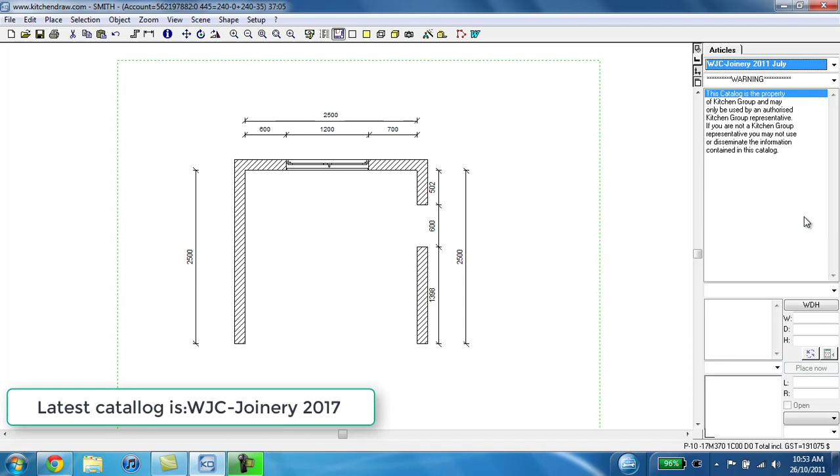It's always a good idea to start in the corner of a room and work outwards. So I'm going to start with a corner bifold cabinet. Being that that's a floor cabinet, I find it under this section and click. Here are the various types of corner bifolds. I'm just going to go with the stock standard 880. Remember, you can check here for your left and right options. I'm going to go with the left.

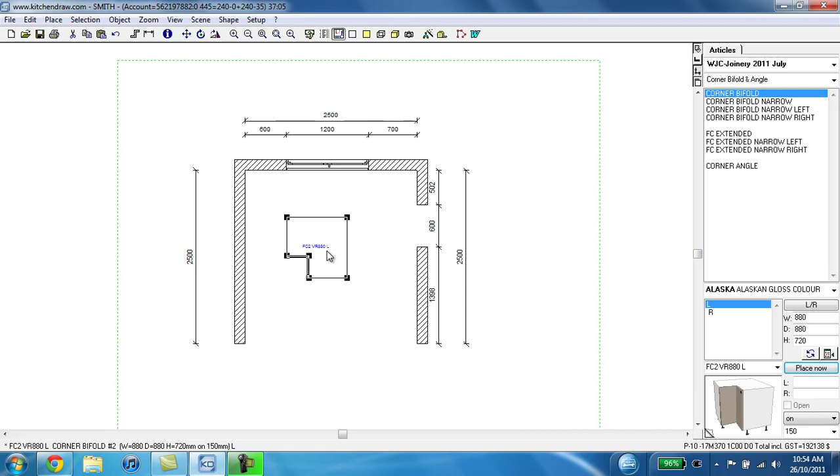Now, to put it onto my drawing, I click on the little 3D view. Keep in mind, if you can't see the 3D view, you just want to turn the page once or twice. Click and drag over into position. Before letting go, if you drop it on the middle of your screen, it'll plant itself right there. I'm just going to delete that for the next demonstration.

But if I want to snap it exactly into the corner, I click and drag. What I want to make sure is, because I want it in this corner, I can twist it into place or spin it. While I've got my left click held down, you can click the right button on the mouse and it's going to spin.

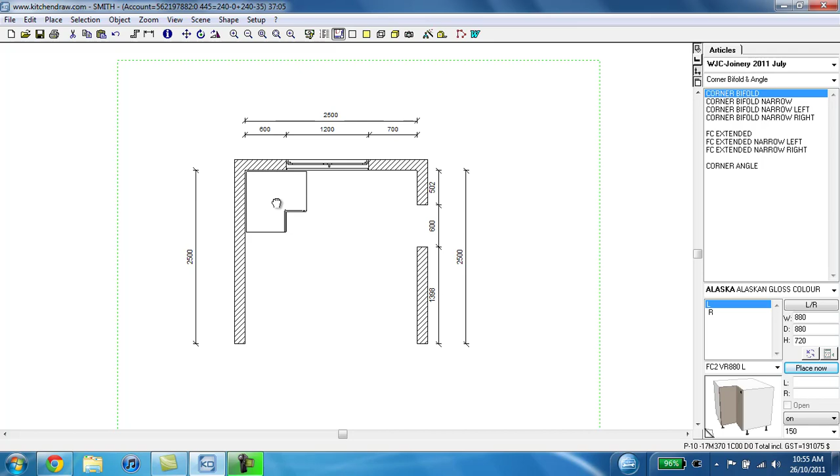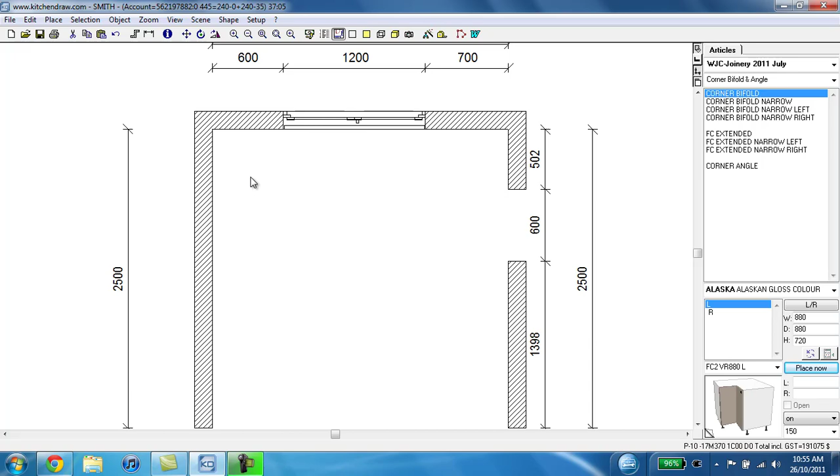Now, I could get it roughly into place here and plant it, but on zooming in, it's not quite on the wall, as you'll see. The best trick for that - I'm just going to delete it again. Click and drag. I'm going to deliberately overlap the cabinet with the two walls that I'm interested in it sitting right up against. It doesn't even matter that I haven't spun it into the right direction. If I just let go of the mouse, it automatically places it exactly into the corner. Perfect.

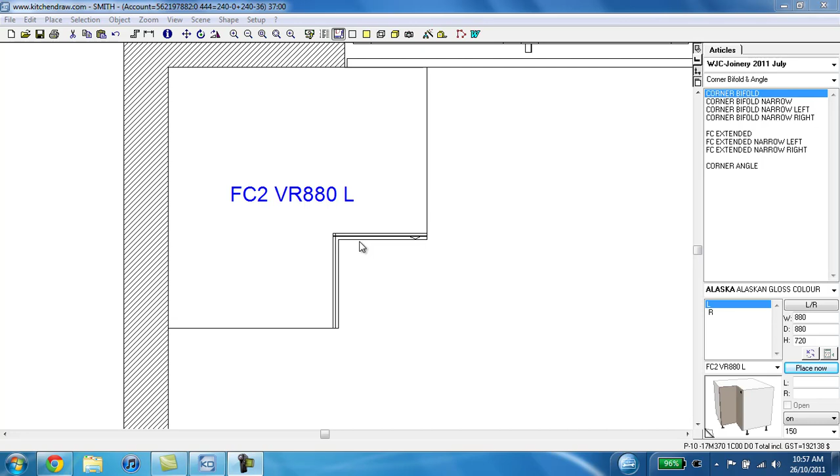So before, when I was dropping this cabinet into place and it wasn't exactly where I wanted it to be, I just kept highlighting it and pressing delete to start again. But let's say you don't want to delete the cabinet - you can click on it to highlight it, click and drag and move it around. So you don't have to go back to the catalogue each time. You can move your cabinets around once they're on the screen. But to get it smack bang in place, put it in the corner, overlap the walls, and there it goes. Once you've got that starting point, it becomes a lot easier to enter in the rest of the cabinets.

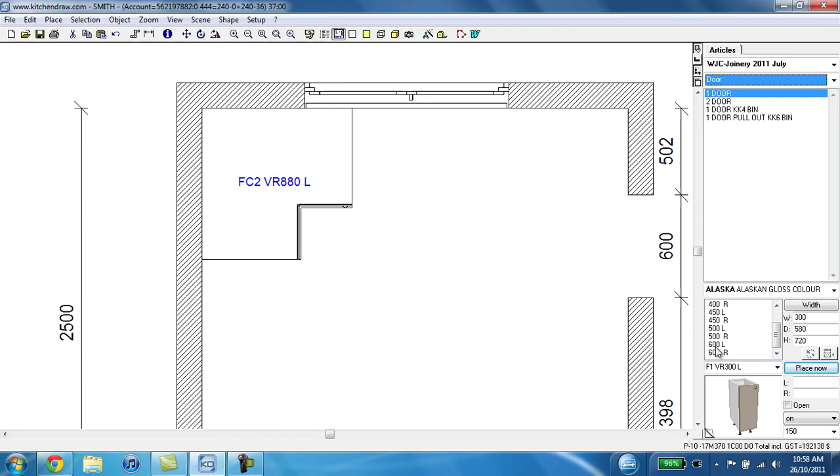So let's say now I want to enter a floor cabinet with one door that's 600 wide. I go back to my subcategory because I'm already in the joinery catalogue. Here are my floor cabinets with one door, and I want a 600 wide door with the hinge on the left hand side. I click, and all I have to do is make sure that it's overlapping the cabinet that I want to sit it exactly next to. So I can plonk it there and let go, and it snaps into place.

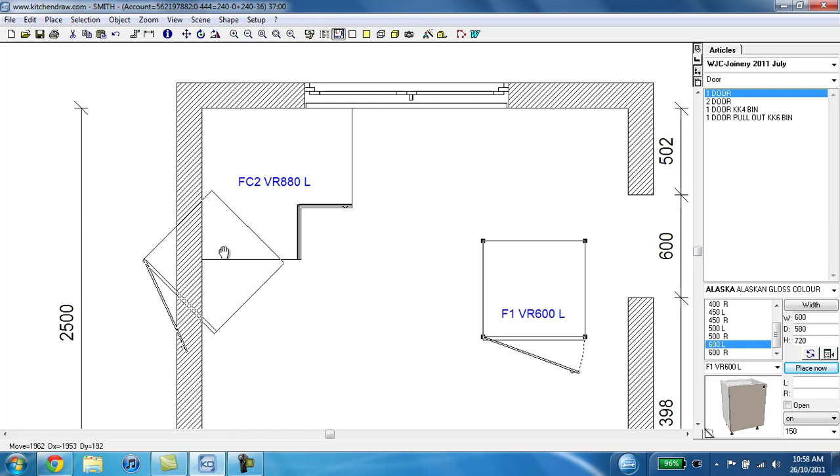Alternatively, I can just hover it over the wall and the cabinet puts it in place. Again, even if I've got it in the wrong direction, if I put it like that, it'll snap into place again. Same works for if I want it over on this side - I let go and it puts it into place for me.

So just to show you that spin and rotate once again, in case you've missed it: click on any object to highlight it, left click again to click and drag to move it about. While you're holding your finger down on the left button, use another finger to click the right button to get it to spin, 45 degrees at a time. Plonk it into place there if you like, or plonk it back into place.

Always remember, it's a very good idea to start in the corner and have all your cabinets snap up to that. It means you don't lose any space - even a few millimeters here or there can make a difference. So theoretically, you can now build the majority of your kitchen with the cabinets. Keep going back to the subcategories here.

Plonk things into place. You'll get a lot of practice at this in your training exercises. Actually, that one's a wee bit too big - just press delete then, and put that into place.

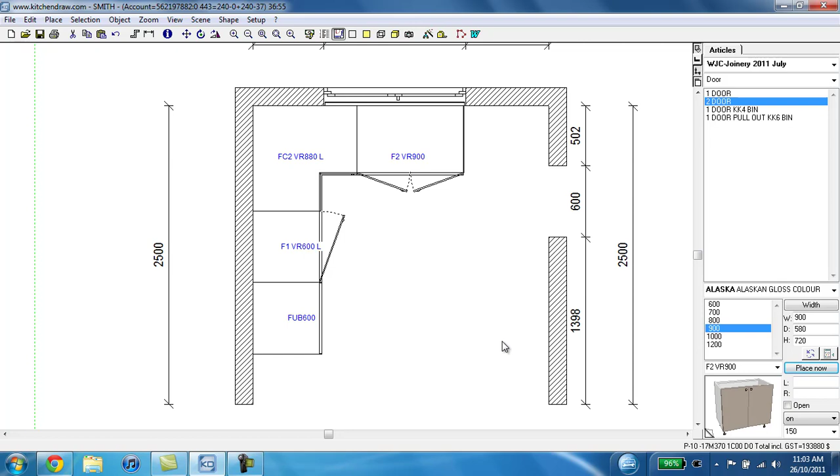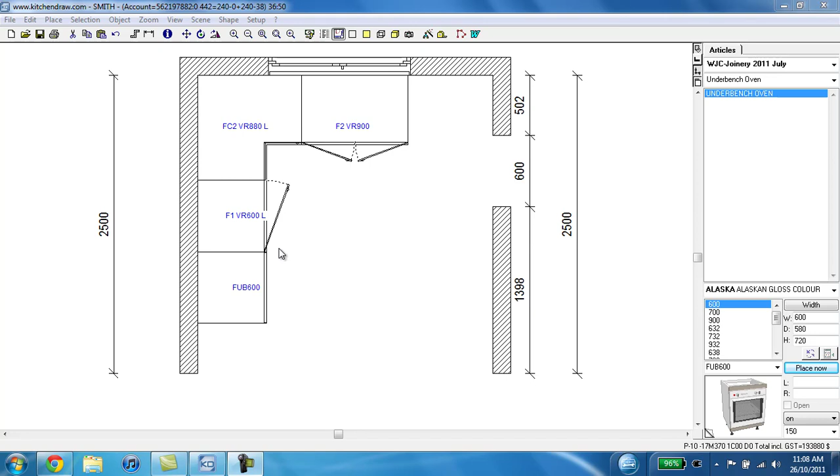Alright, moving on to fillers. As you should know, fillers are required between walls and the start of any cabinet run. So in some cases, fillers may be the first thing you place into your drawing rather than corner cabinets. I'm just going to delete what I've done here, just to demonstrate how to place some floor fillers.

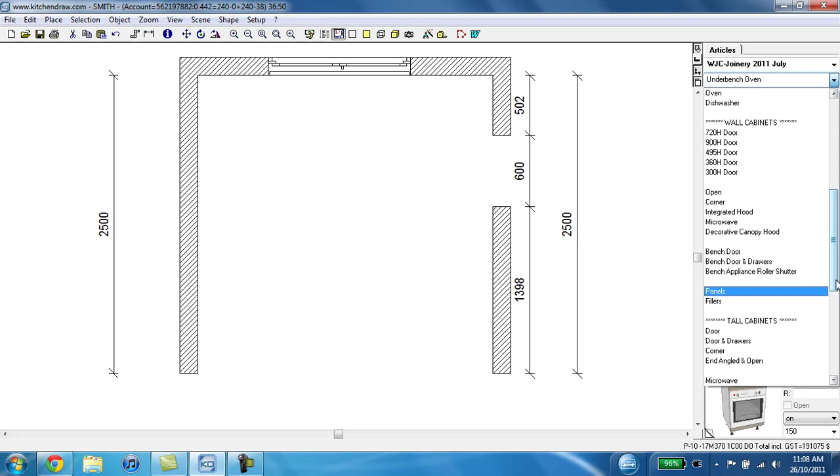There are several types of fillers, so we've categorized them with the cabinets that they go with. For example, there are floor fillers, wall fillers, tall fillers, and so on. But for purposes of this demonstration, let's go with a floor filler.

Now there's two types. It's going to ask you either a filler that stays on the kickboard like the cabinets, or a filler that goes to the floor. In this case, I'm looking at a kickboard filler.

In this option here, it gives you the various sizes. If it's just going next to a normal cabinet, the height is 720, like a standard cabinet. So that's what these numbers are here. But the first lot of numbers are to do with the width of the filler, so I'm going to start off with a 30mm wide filler.

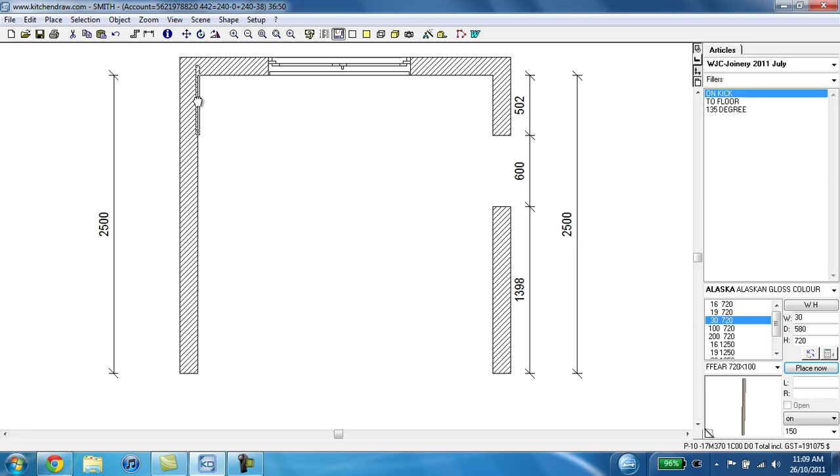And click and drag it into place. Now, like the cabinet, I just overlap it with the two walls that I want it to slot into against. I'll just zoom in here for you - you can see that it's dropped perfectly into the corner.

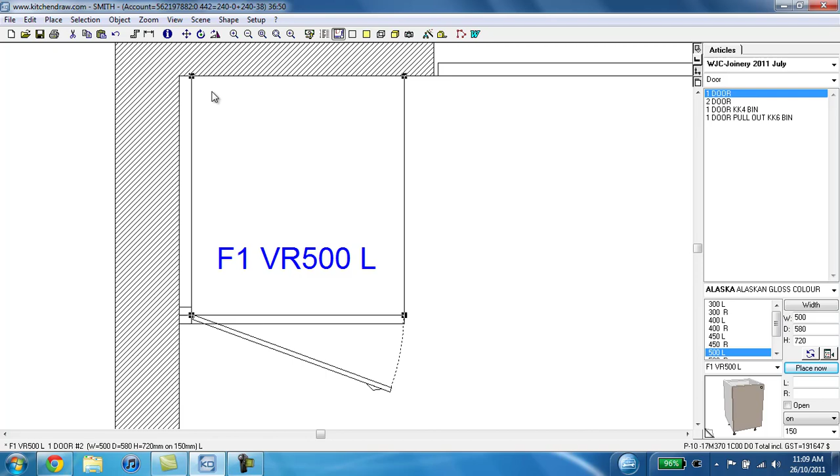And then, as usual, I'd go back to my floor cabinets, click, drag, overlap the two items, and it slots in perfectly. Just zoom out again. So we could build a run of cabinets along here.

Eventually we'd also come to the panels, so I'm just going to put a few more cabinets in. There we are.

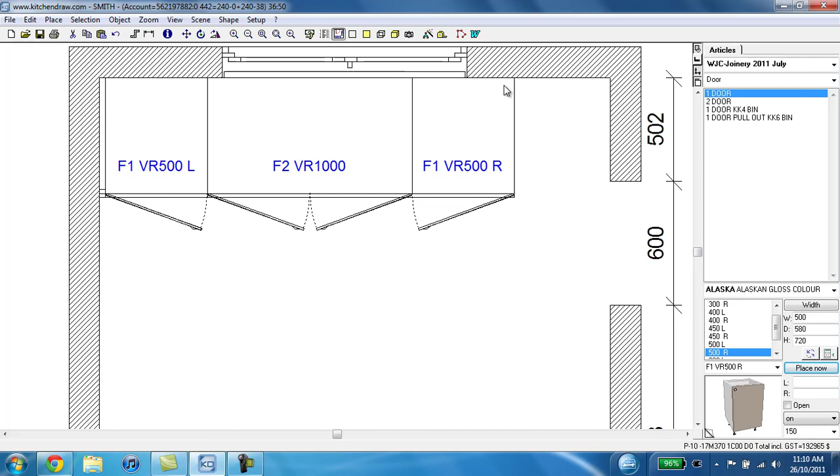I now need to put a panel at the end of this run here. Panels you'll often find are sitting somewhere very close to the fillers section. So this panel, I would actually want it to go all the way to the floor so that it ends the kickboard run.

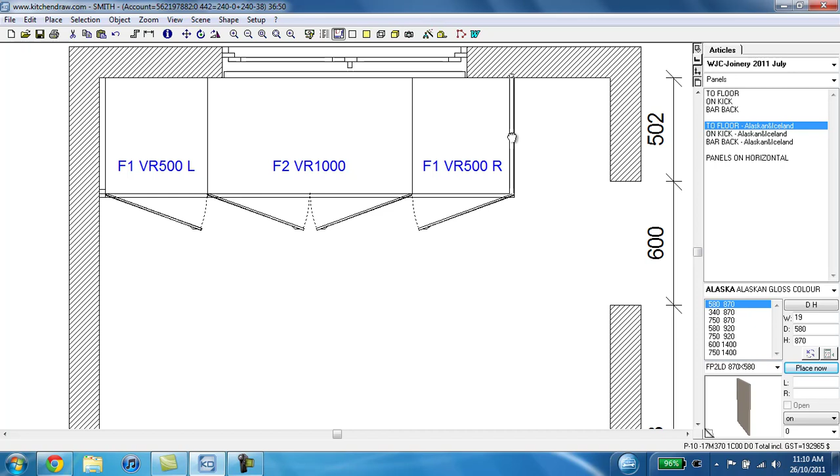So that's where these are here. There are three types of panels: to the floor, to the kick, and bar back panels. But we've also got a second section for ones that are for Alaskan and Iceland range because they're thicker. So in this instance, I need a floor panel that's 19mm thick, that's 580mm deep, and 870mm high. Click and drag, and there it is.

The main thing to remember at all times with KitchenDraw is practice just makes perfect. If you're a little overwhelmed at the moment here, that's absolutely fine. It's just a matter of having a go at the exercises, getting as familiar as possible with the layout of the program, where to look for the various items that you want to place in the kitchen, and just having lots of practice at it.

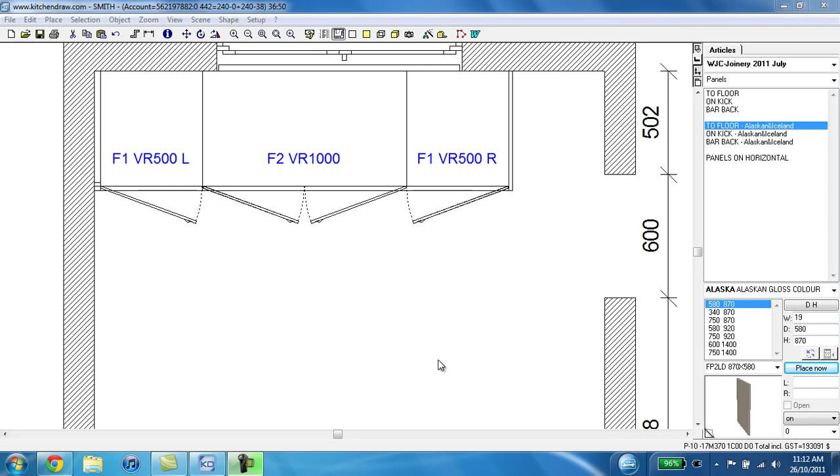Next, we're going to move on to bar back panels. These are good for island benches or breakfast bars, that kind of thing. I'm just going to zoom out a little bit here and pan down. Remember, the way I'm panning across the room is to click down the wheel on the mouse, hold it down to drag it about so I can focus on an area of the kitchen that I want.

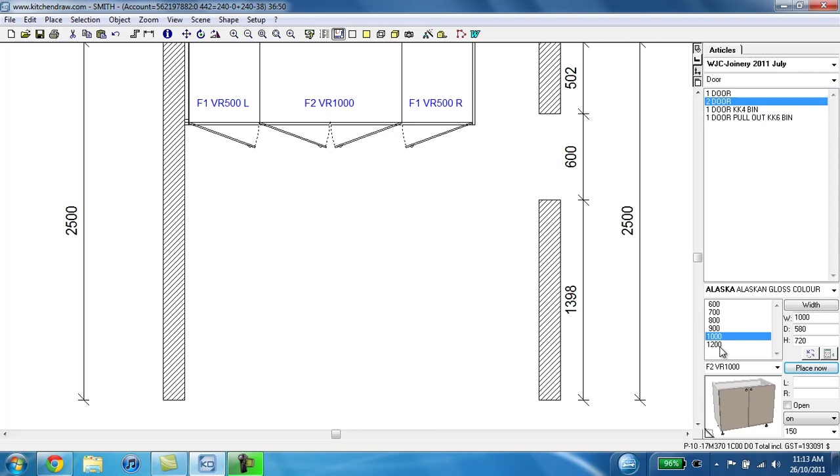Okay, so I'm just going to build a little island bench here made out of a couple of cabinets. Let's say it's 1 meter wide - here the spinning comes in useful. Sit that there on the drawing.

Let's just make a small panel, small island here. I just need a couple of floor panels either side. Hover it over the edge of the cabinet - it should slot into place.

But I need one more panel here along the back of the cabinet. So there's no floor panel that comes that wide - that's why we need to go to the bar back section.

Once you've clicked on bar back, down here is now where you need to look. Standard is the 870 high, and then we've got 4 lengths to choose from: 1 meter, 1500, 2000, 2400.

Remember to always take into account the width of the panels that you've placed either side of an island bench. For example, in this case, we've got a cabinet that's 1000 wide with 2 19mm panels either side, so in total we need this bar back to be 1038mm long.

This first bar back is only 1000mm long, so we need to go to the next length up, which is 1500.

I can specify the depth, but for this demonstration I'm going to show you another little trick. So you click and drag. In this case, with bar back panels, they're quite unique. You don't want to place them exactly into spot yet, because if I do that, it's going to snap to the side of the cabinet, because these panels want to stick to the sides of cabinets, but in this case we don't want that.

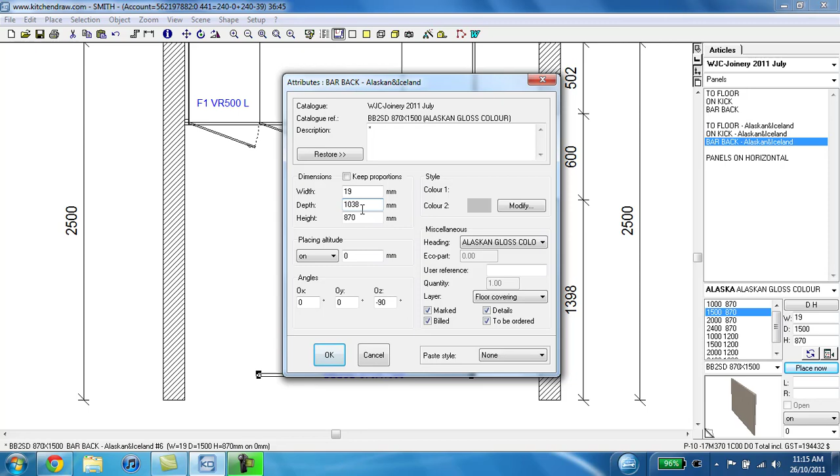We want it to be 1038mm, and click OK. Now see how that's just shrunk itself down? That's what we want. Alternatively, if you already knew from day one that you wanted that bar back panel to be 1038, you could just enter that information over here and click and drag, and it would already be the size you need it to be.

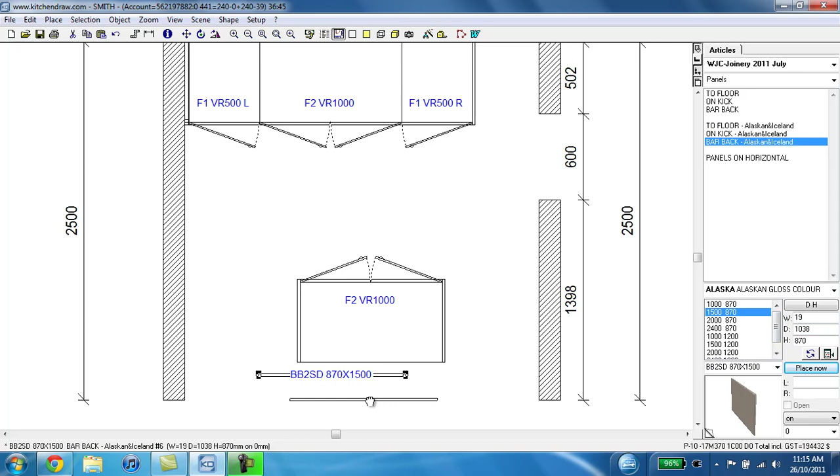Now we've got 2, so I'll just get rid of one of them by pressing delete on my keyboard. We're now going to move this bar back panel into place.

Click on it once to highlight it. Now see these little black squares? You've probably noticed those on pretty much all items on the drawing. These are called anchor points. So if I were to click on this one here, see how that brings up some anchor points as well?

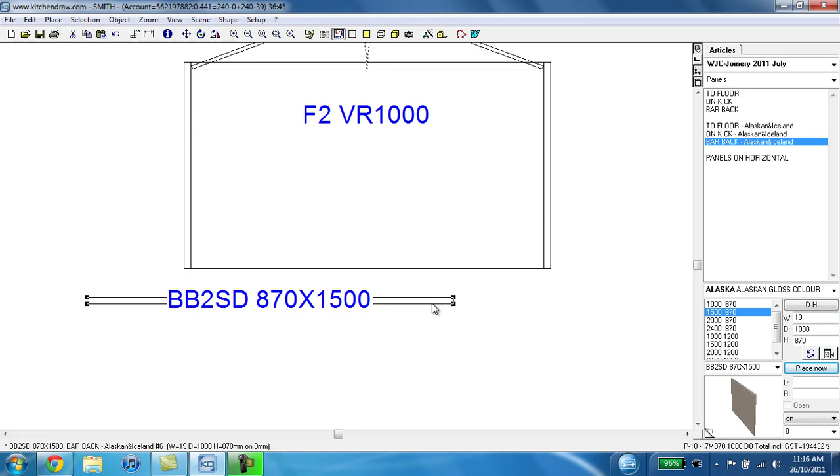KitchenDraw has a trick: it likes to snap an anchor point to another anchor point. So in order to move it into place, I could just click and drag and line it up, and it looks pretty okay. I click it, okay, zoom in a bit, but see how it hasn't snapped into place properly?

I want to be a bit more exact than that, so I'm just going to move it away for a tick. There is a button called Move, which is up here on the menu. Alternatively, you can highlight the item and right click to say Move.

Now see how you've got these arrows appear next to your cursor or arrow? That's to show that we're about to move it. This is the anchor point that I'm interested in, because I want this anchor point to match that point there. So I'm going to click on it, hover it near the region, and it's just snapped into place.

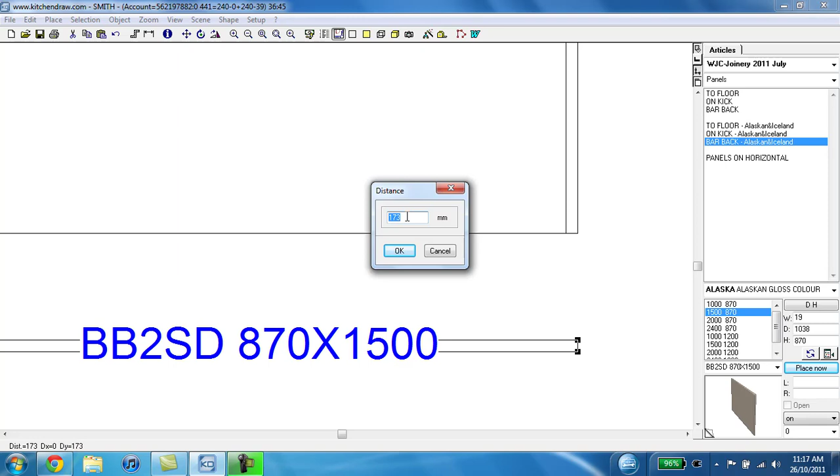See how it's kind of magnetized to that spot? I just let go. Sometimes you can enter in a specific distance if you know exactly how far you want it to move, but in this case we're snapping a magnetized point to another, so we just click OK. And there it goes, it's in place.

So those are bar back panels. Key points to remember: always remember to round up to the next longest bar back that you need. So even though we only needed 38 mil on top of the 1000 wide, we still have to go up to the 1500 panel and cut it down.

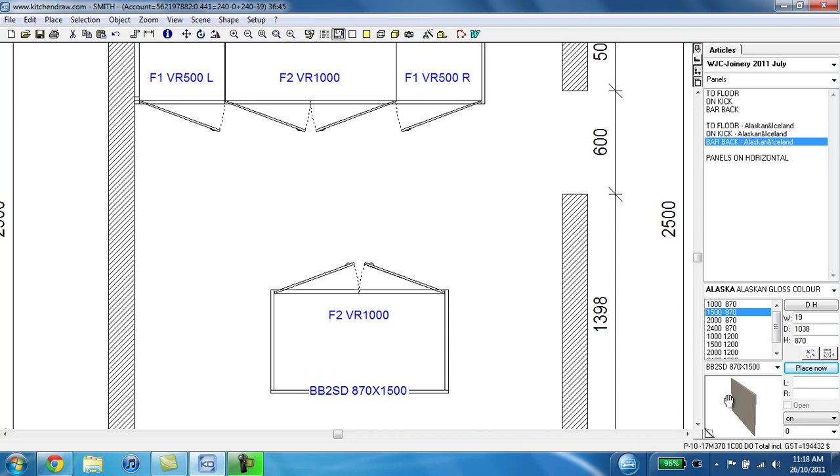And the other thing to remember is it doesn't like being snapped into place. You're going to have to move it yourself. And if you can master that move function, there's not a whole lot in KitchenDraw that you won't be able to do after that.